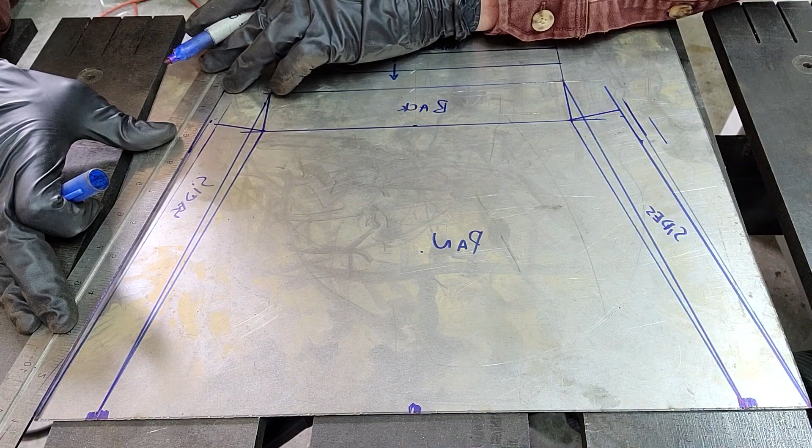So I laid out a similar idea to what we have at the school, except this is a little piece of sheet metal that I've got instead of those hefty, burly pans.

You can see that we've got our main pan, and it's 12 inches across, centered up. Now I always find the center of my plate, and then I'll either use a framing square or my speed square and square off of one edge.

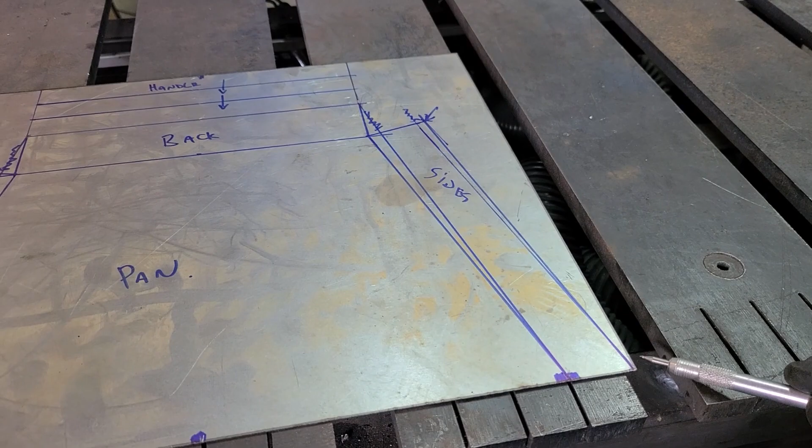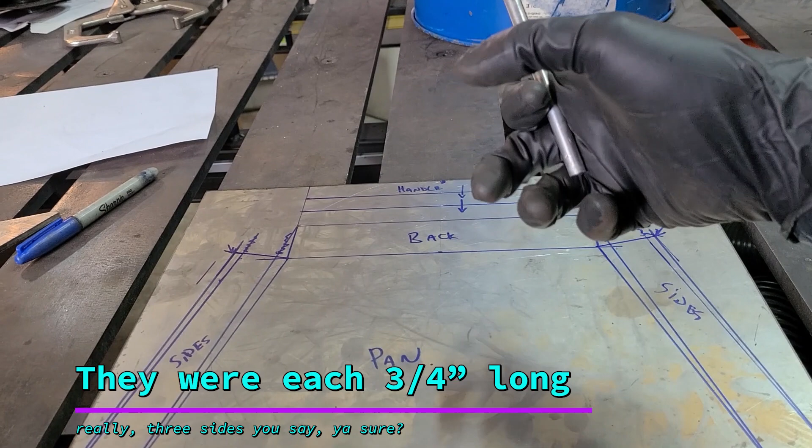And the handle is just going to be a little triangle that's going to get bent over itself. Right here it'll be a little bit of a 3-sided triangle just on the back, so I can scoop my fingers underneath it. My thumb will just be right here, and then I can use that with my dust brush.

So what I'm going to do now is lightly score everything. It's really, really thin stuff, but we just got to make sure we don't cut all the way through, because that would be bad.

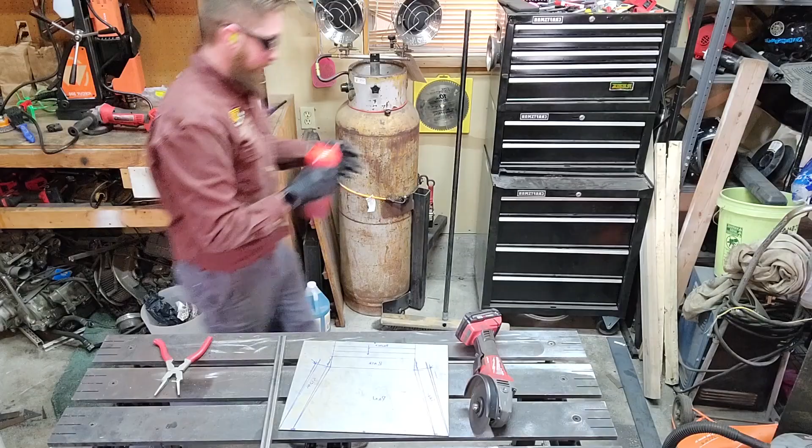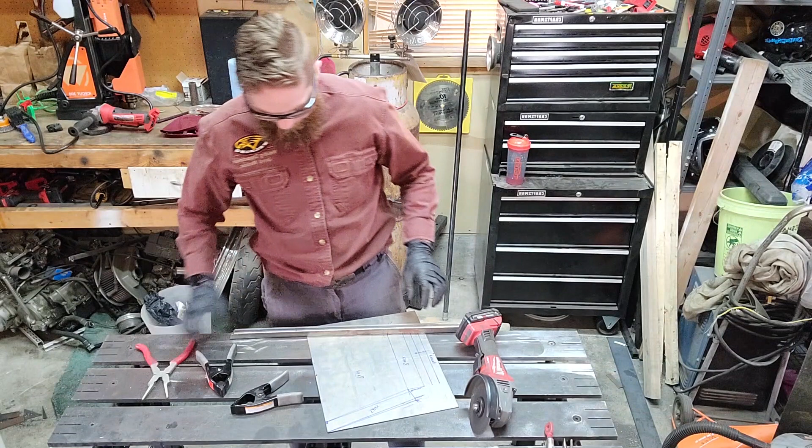So what we're going to do first is cut out our excess, and we're going to use this as a guide.

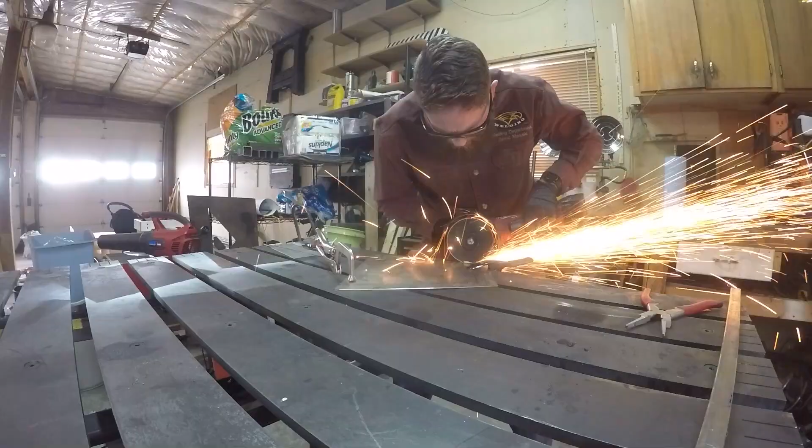I did a little relief cut in this little corner right here. It allows the metal to bend up tighter together than if I were to not do that.

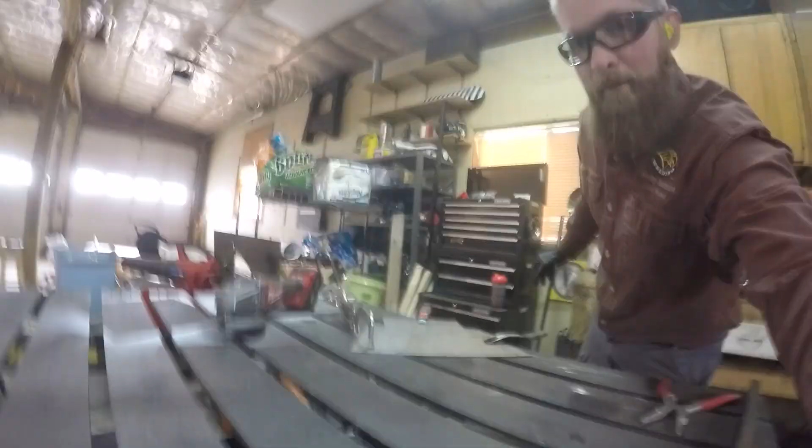That's what I was talking about with the relief corner. That's going to help it bend up closer together.

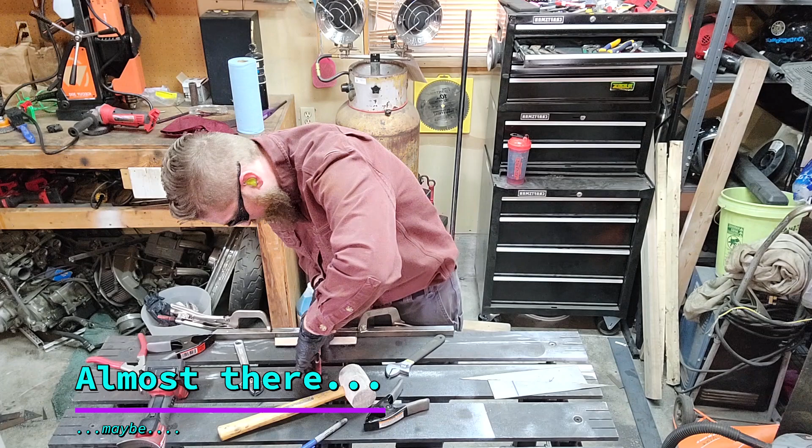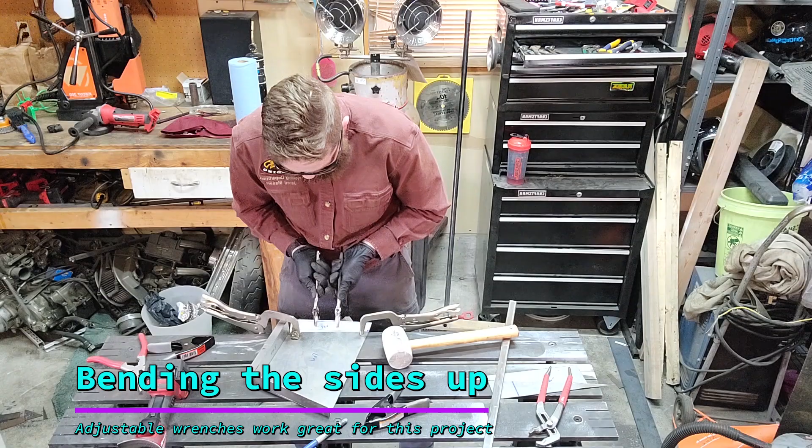And how are you going to weld?

Alright, I think that's it. All I think I need to do now is transfer a line across there because I didn't do that earlier.

Only thing left to do now is weld these corners up.

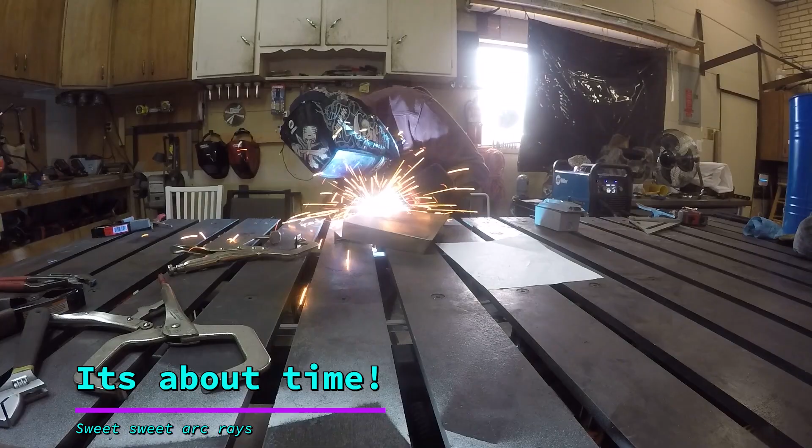It was just because when you were welding on the other side, it welded on the other side too. Yeah, it got hot, didn't it?

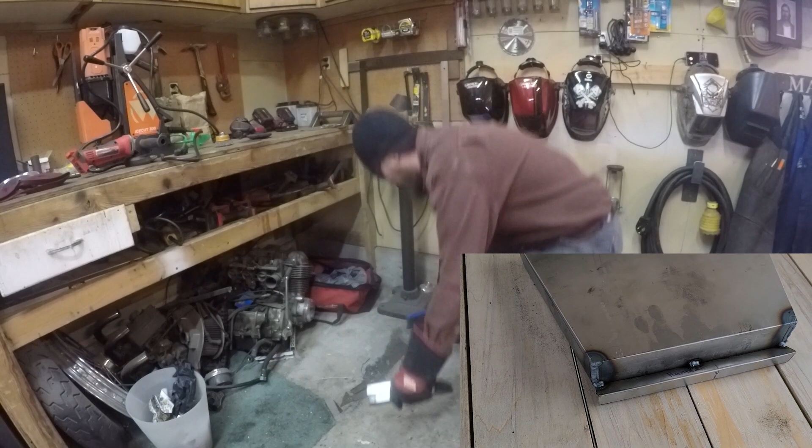It's done. It is done. So, I think we're done.